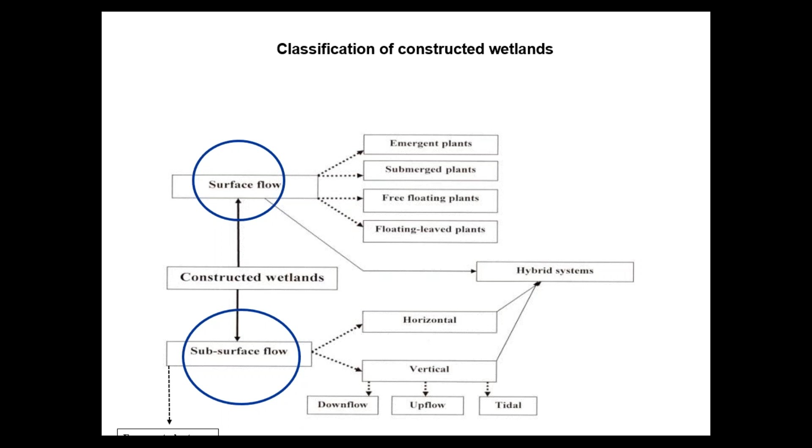Hybrid systems are mostly a combination of horizontal and vertical flow systems in order to achieve better removal of total nitrogen. Horizontal flow systems, which are anoxic or anaerobic, provide good conditions for denitrification, while vertical flow systems are very good for nitrification. So if we combine them, we can remove total nitrogen. In general, we can combine all types of constructed wetlands in order to enhance treatment performance.

Let's start with free water surface constructed wetlands. They are usually very shallow trenches with water level between 5 and 40 centimeters, very commonly only 20 centimeters. There is no special requirement for soils; if soil is present, its major role is to support the growth of plants. Liner is optional. These systems are usually very large, some tens of hectares or even larger, therefore a liner would be very expensive.

Vegetation is usually not harvested, only if we use free floating plants like lemna or water hyacinth, where it's recommended to harvest the plants. Otherwise, in systems with emergent vegetation, the decaying plants may provide organic carbon for denitrification. In general, these systems provide very good removal of organics, suspended solids, and bacteria, but this is more or less the same for all types of constructed wetlands.

The major difference is the removal of nitrogen. In free water surface systems, we achieve relatively medium removal of nitrogen because these systems are mostly aerobic, so we can expect nitrification. If algae are present, they may increase pH, and ammonia volatilization may be very effective. In the layer of decaying plant material, we can expect some denitrification. However, there is usually very low removal of phosphorus, because phosphorus is mostly removed by adsorption and precipitation with aluminum, iron, calcium, or magnesium, and in these systems there is relatively very low contact of water and soil.

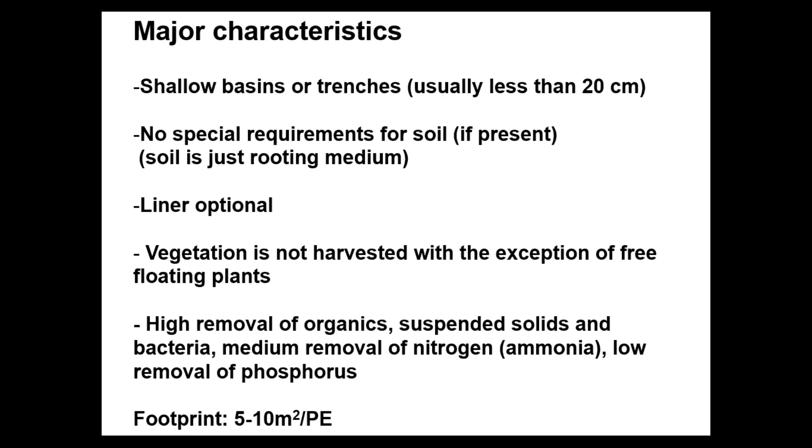The footprint or area required is usually between 5 and 10 square meters per PE, meaning per population equivalent. Let's say, very simply, 5 to 10 square meters per connected person.

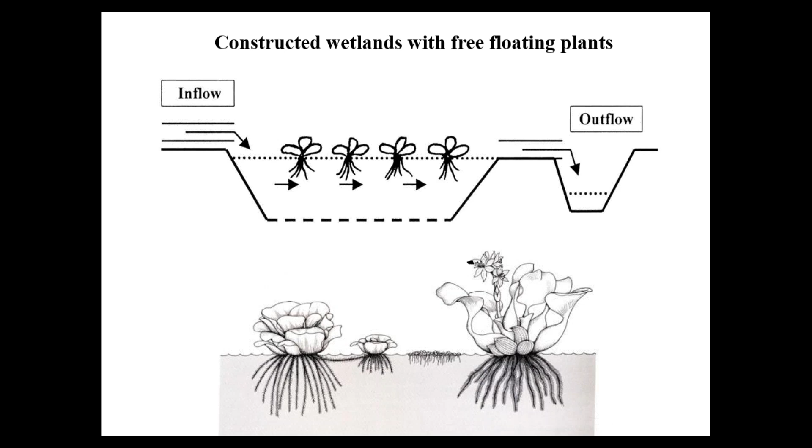So, a few examples: these are constructed wetlands with free floating plants. Free floating plants do not have any active movement; they are moved by wind or current, and there are two major species used: duckweed (Lemnaceae) and water hyacinth. Water hyacinth is a very noxious weed in the subtropics and tropics, and its very vigorous growth gives the potential for removal of nutrients, which is true, but maintenance and operation is a little difficult because you keep on harvesting, and the water hyacinth becomes a waste nobody wants to deal with. One restriction is it doesn't survive winter in temperate and cold climates, so it's restricted to subtropics and tropics, and it creates a lot of waste material during operation.

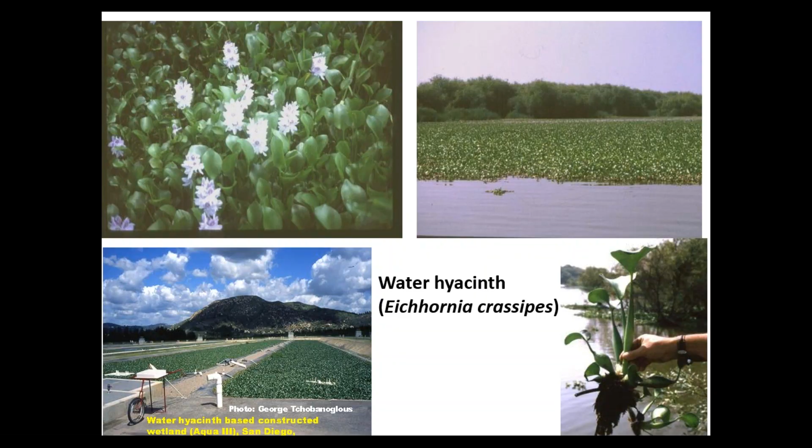This is an example of an existing system from Thailand. You see that the water hyacinth really covers every possible area. So even if you want to prevent the growth, you must create some mechanical fence, otherwise it will overgrow the entire water surface.

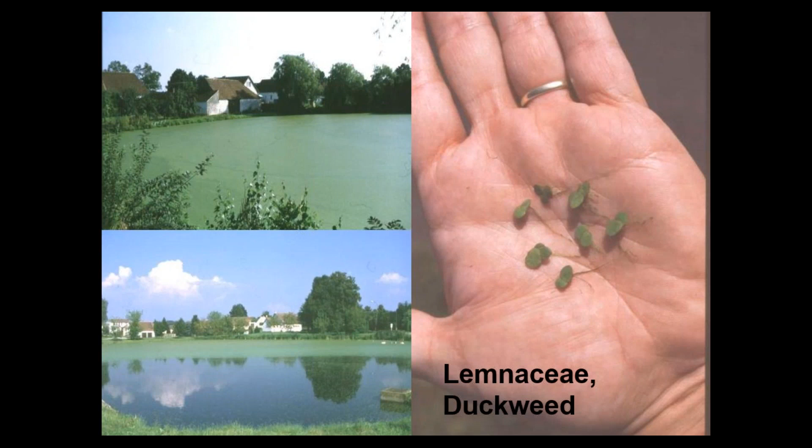Lemnaceae, duckweeds, are very similar, very tiny plants. They are not so sensitive to temperature; they can easily survive in a very cold climate, and they create the same situation we've seen for water hyacinth: they completely cover the surface. On one hand this may help sedimentation of particles, but on the other hand it prevents light penetration into the water column, which may prevent photosynthesis of algae, which are producers of oxygen. So if this situation lasts for a longer time, it may create anoxic conditions.

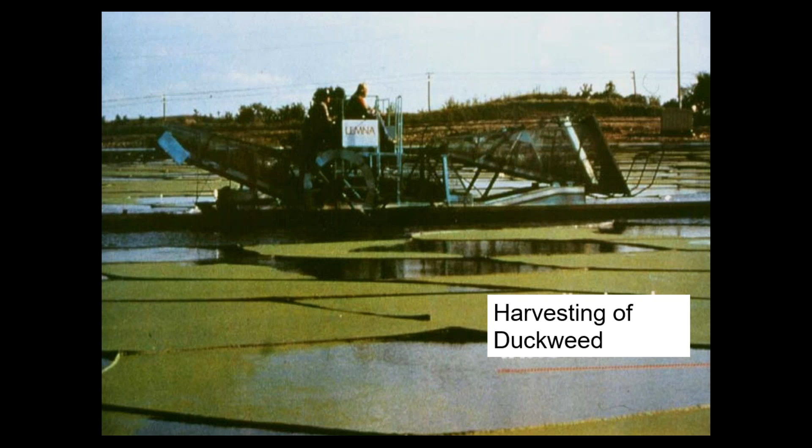As you see, this is the maintenance and operation problems. You also have to harvest the plants quite often in order to allow new plants to grow, and these huge harvesters are necessary to harvest these very tiny plants. So again, maintenance and operation is a little bit more expensive.

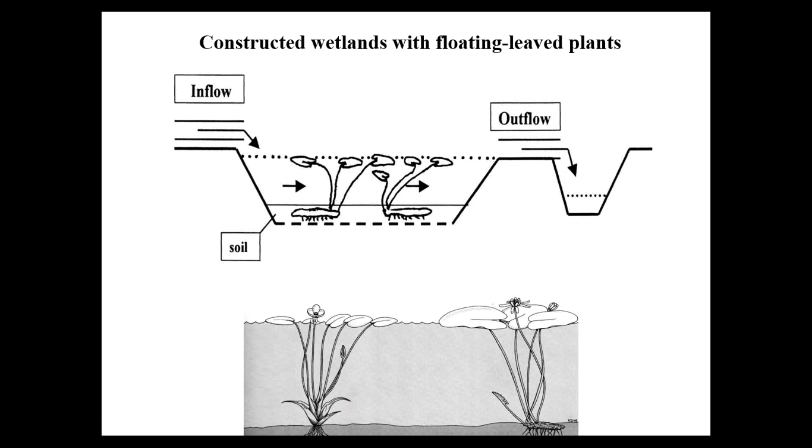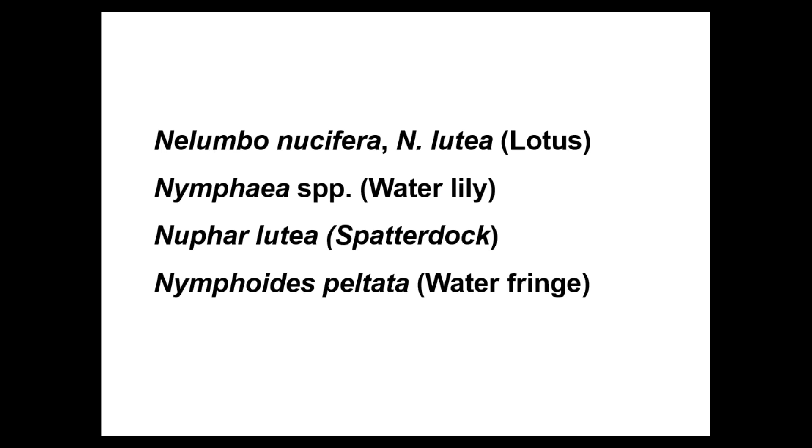Then we have plants with floating leaves. Those are water lilies. There are not so many systems which would use these plants, but there are some, therefore I included it in my presentation. So those could be the species: lotus, water lilies, spatterdock, water fringe, Nymphoides peltata, and nice plants. They are very, very ornamental.

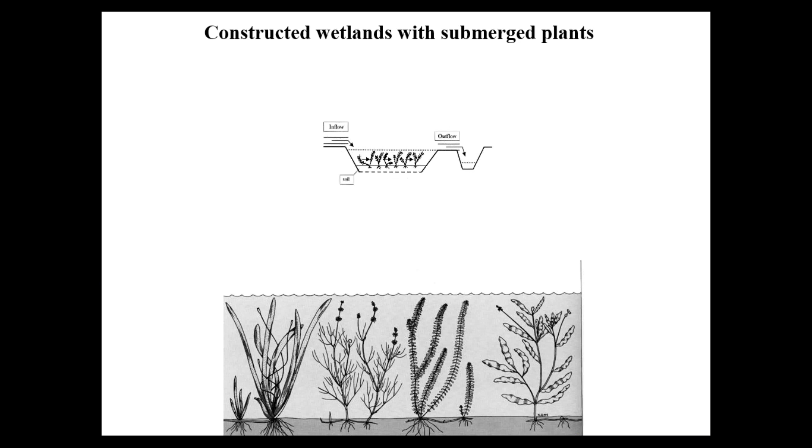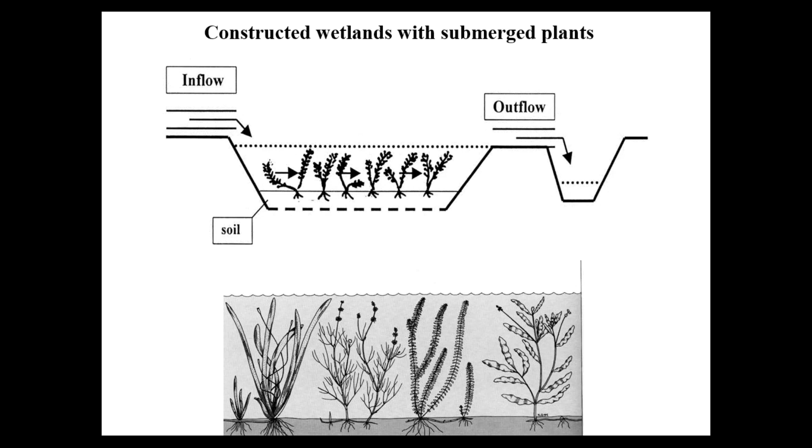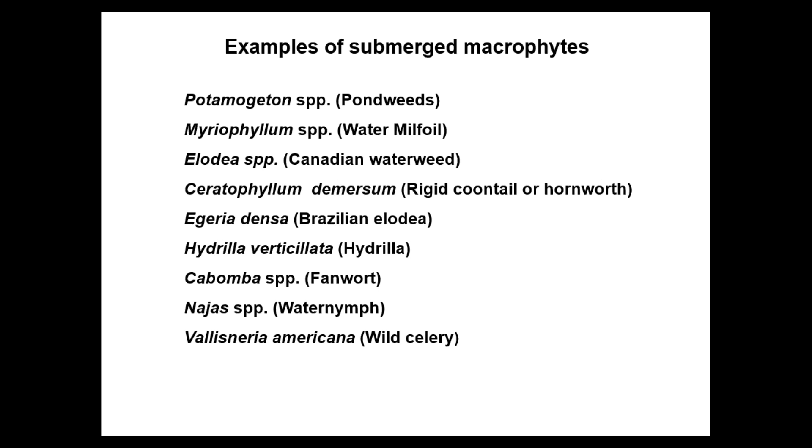Another group are wetlands with submerged plants. Those are plants which are completely submerged in the water. They root in the sediment and they do not grow above the water, that means they are completely submerged. A few examples: Potamogeton, Myriophyllum, Elodea, Ceratophyllum, very common plants you can use in any other natural wetlands.

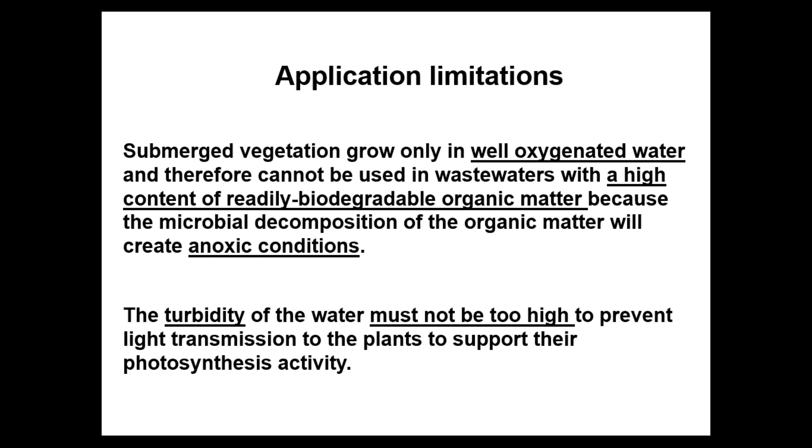There are two restrictions or limitations of application. First, the plants grow usually much better in well oxygenated water. Of course, this is not the case of wastewaters. Also, the turbidity of the water should be very low, because all the photosynthetic parts are submerged in the water, so the more turbid the water, the less light penetrates to the plants and it restricts photosynthesis. Therefore, these systems are usually used for tertiary treatment or to treat waters with low concentration of organics, because if you have high concentration of organics, usually concentration of oxygen is very low.

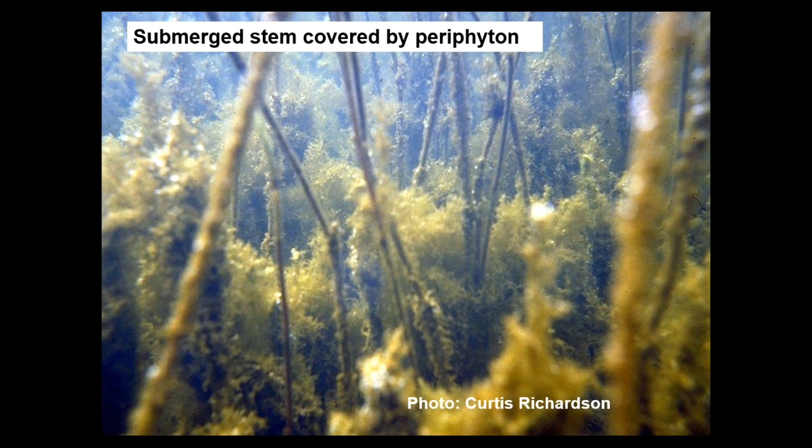It's very quickly depleted. A few examples, and also as all submerged subjects, plants are overgrown with periphyton, which is an assemblage usually based on algae, and they are very useful because they produce a lot of oxygen, so therefore they help to oxygenate the water. They also take up a lot of nutrients, phosphorus and nitrogen, but because algae are short-lived, the storage is not long term, because they die back and nutrients are released back into the water. So it's a very short circle.

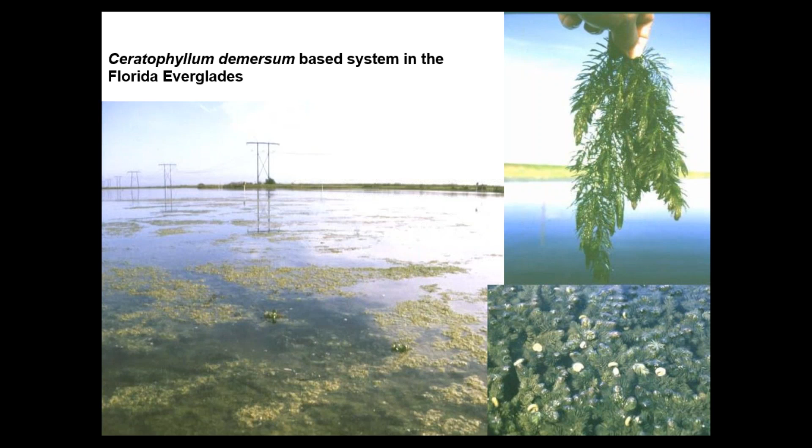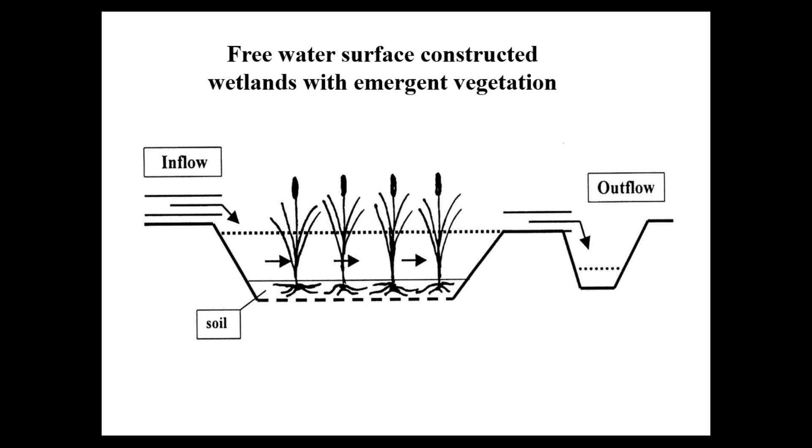Probably the largest group of the constructed wetlands with free water surface are wetlands with emergent vegetation. Those are the most typical wetland plants, like Phragmites, Typha, Carex, Scirpus, Juncus. It's usually a shallow trench with the water level between 5 and 40 centimeters, and is very heavily overgrown with wetland vegetation.

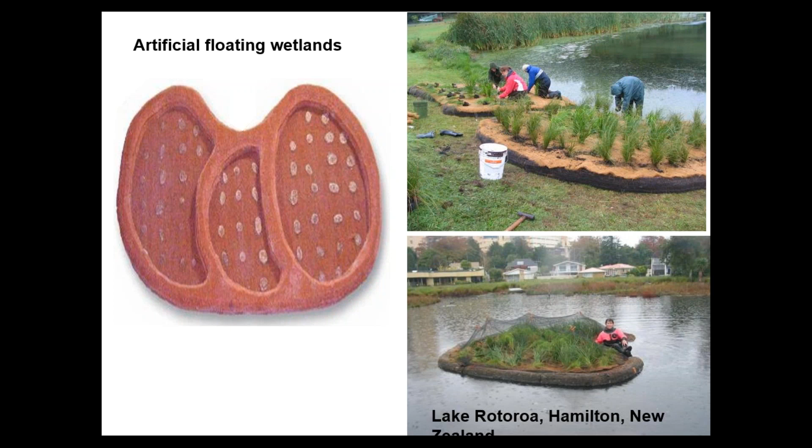These islands could also be smaller ones, like this example from New Zealand, where they use floating styrofoam forms which are artificially planted with plants and may help clean the water.

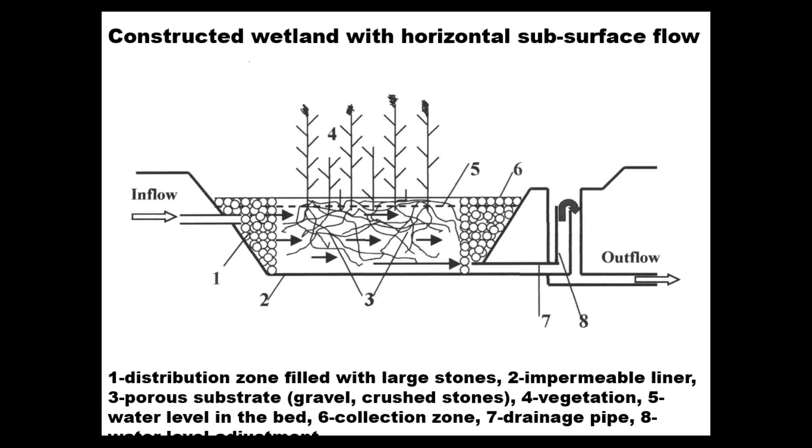Now we come to subsurface flow constructed wetlands. The first large group are those with subsurface horizontal flow, where the pre-treated water comes to a zone of large stones for good distribution. Then the water flows, ideally, through very porous material, usually gravel or crushed rock, and is collected at the end of the filtration bed. Using the principle of connected vessels, the water level in the filtration bed can be maintained at the outflow sump.

These systems require good mechanical pretreatment to remove as much suspended solids as possible, because they can clog the filtration material. They are usually 0.6 to 1 meter deep and use filtration material with very high hydraulic conductivity.

The early systems, used in Germany and Denmark in the late 1970s and early 1980s, used soil. Soil had very good treatment efficiency, but hydraulic conductivity was very low, and the subsurface flow usually switched to surface flow very soon.

These systems are usually always lined, in most cases with a plastic liner. Emergent wetland vegetation harvest is optional, but in most cases it's harvested, with the exception of the UK, where they never harvest the plants.

Again, it's very effective for removal of organic suspended solids and compounds removed under anoxic or anaerobic conditions, such as nitrate and sulfate. There's good removal of bacteria and heavy metals. On the other hand, there is usually very low removal of ammonia, because the filtration bed is mostly anoxic, so there isn't enough oxygen for nitrification, and also low removal of phosphorus, unless special materials are used.

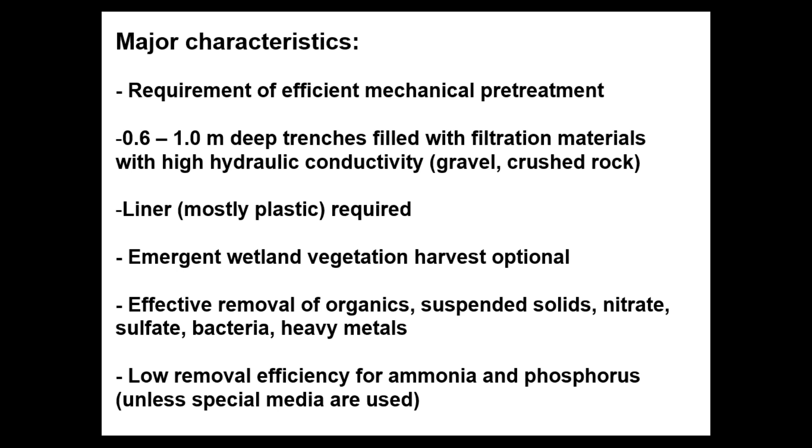This is one of the topics being intensively researched now: the use of filtration materials with large sorption capacity. It could be expanded clay particles, or waste materials like slags rich in calcium, iron, or aluminium. But the sorption capacity is always limited, so at a certain time it needs to be replaced. In general, these systems are not very useful for removal of phosphorus.

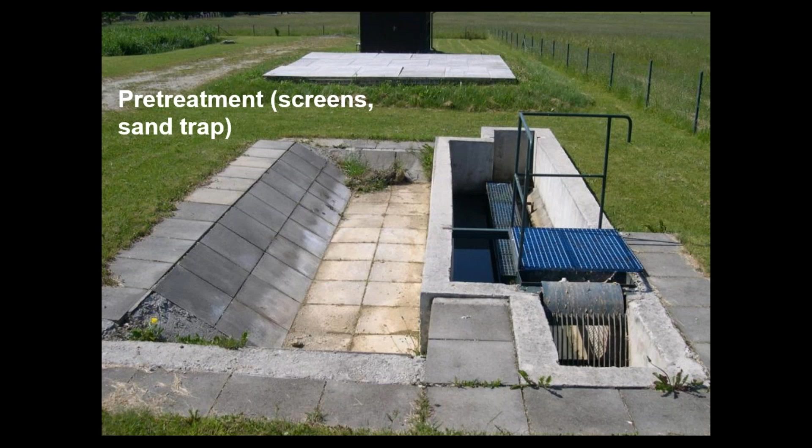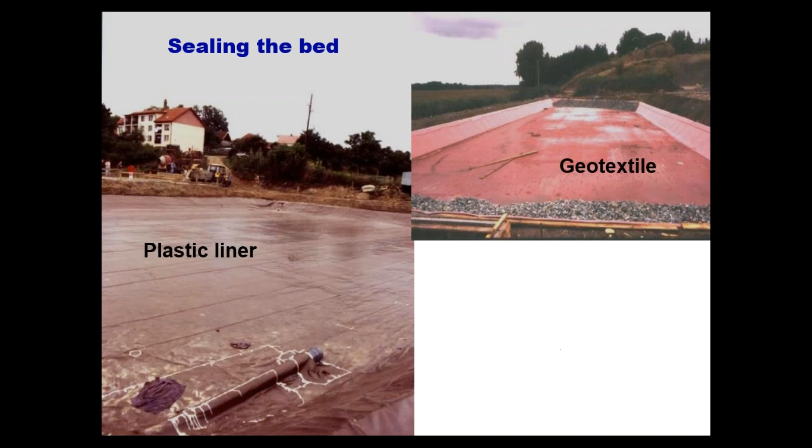So a few examples of the layout. This is a very simple pre-treatment, for example for a small village. You can see the screens in front, and there's a sand trap or grit chamber, whatever you call it. As I said, the systems are usually lined with plastic, and sometimes covered with geotextile to provide good protection.

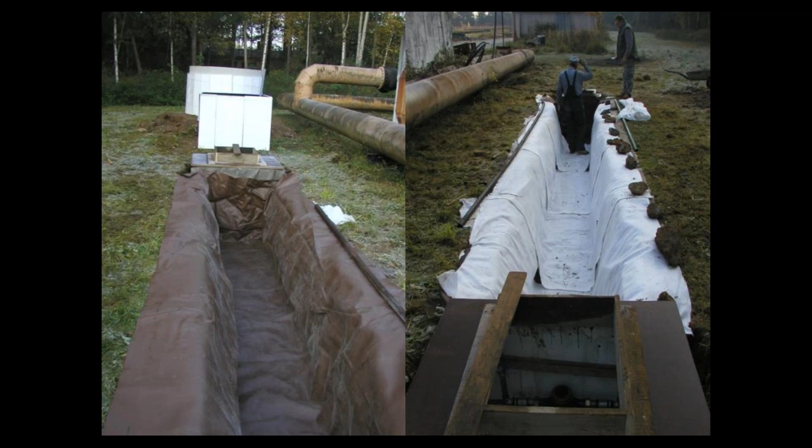Here we see the liner of a small on-site system, with a plastic liner and geotextile on the side. This is a little larger installation. On the right side, you see the distribution zone filled with large stones for good distribution, and then the filtration material.

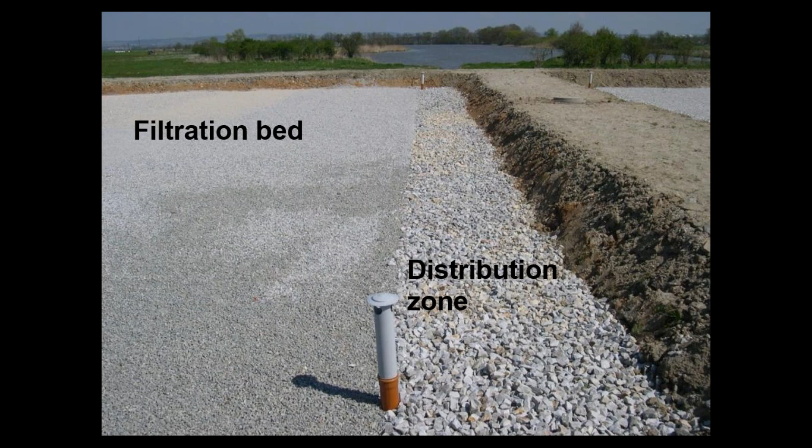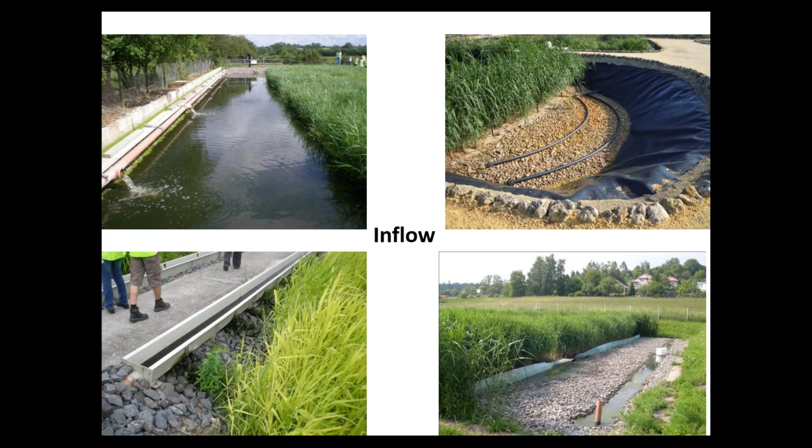This filtration material is usually sized between 5 and 20 millimeters, and it's recommended to use only one fraction, no layers at all. Even mixing is sometimes not good, because water always tries to flow the easiest way, causing short circuiting. So one fraction is best. Then we have water distribution, which can be done in different ways. It's really important to distribute the water across the bed in order to load the whole profile evenly.

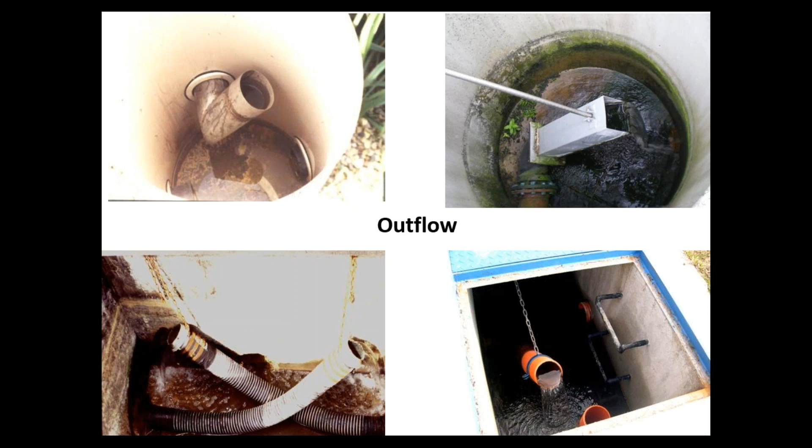We also have some mechanisms using which we can maintain the water level. The lower two pictures are probably the best: either a flexible hose or plastic pipe hanging on an easy chain, so you can move it up and down if necessary.

And we have the vertical flow constructed wetlands, which differ from the horizontal ones because the water flows vertically. It's brought to the surface and percolates through the filtration layers to the bottom where it is collected.

In difference with horizontal flow systems, here we use layers. Usually we use some coarse material on top in order to prevent clogging. The major filtration layer is usually sand, and then we have the drainage layer with larger stones at the bottom. They are intermittently fed in order to allow for oxygenation of the bed.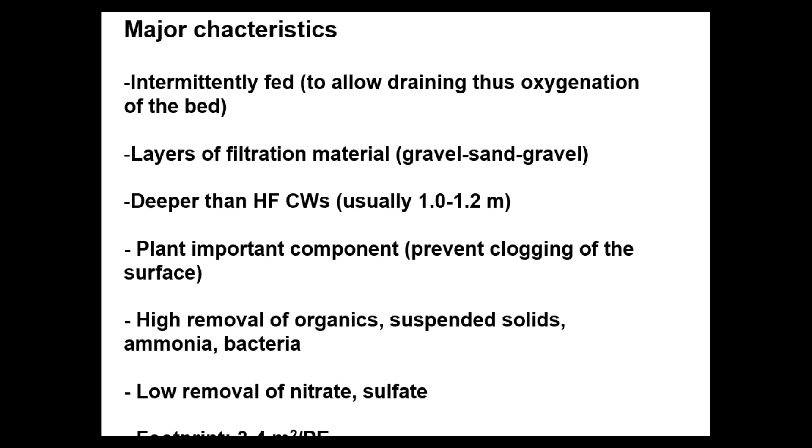I'm not sure if you can see the bottom line, but it says the footprint is between 3 and 4 square meters per person. I may have missed showing it for the horizontal flow systems, but those are usually 5 square meters per person. So vertical flow filters usually use a little bit less area: horizontal flow about 5 meters, vertical flow 3 to 4 meters.

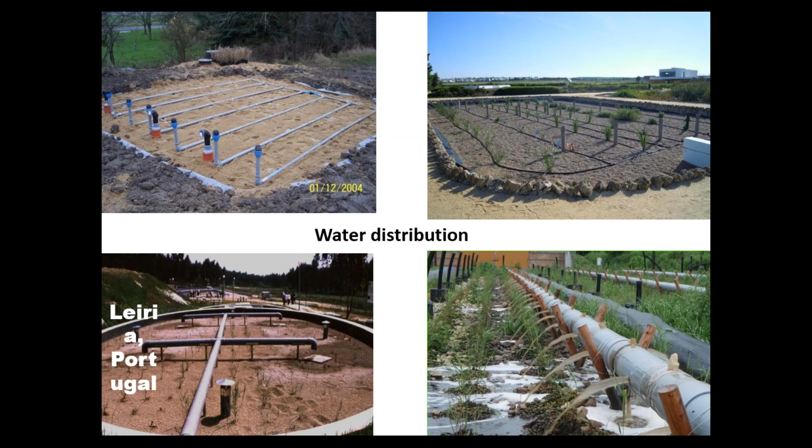Here is the different water distribution. Again, we need to supply the whole surface evenly, and the best way is to very temporarily flood the whole surface so the distribution of water is very even. If, for example, some of these pipes fail, we can overload a certain part of the filter, while another part may not be filled with water at all.

A few examples: this is the on-site system in Denmark, in Mørke. The next system is from France. France is probably the country where vertical flow systems are used most - they have 3 to 4,000 installations in France, again planted with Phragmites australis.

This is a quite large installation, 25 hectares in China, in South China near Guangzhou. They have these plants planted across 25 hectares of vertical flow. So even these vertical flow systems can be really very large.

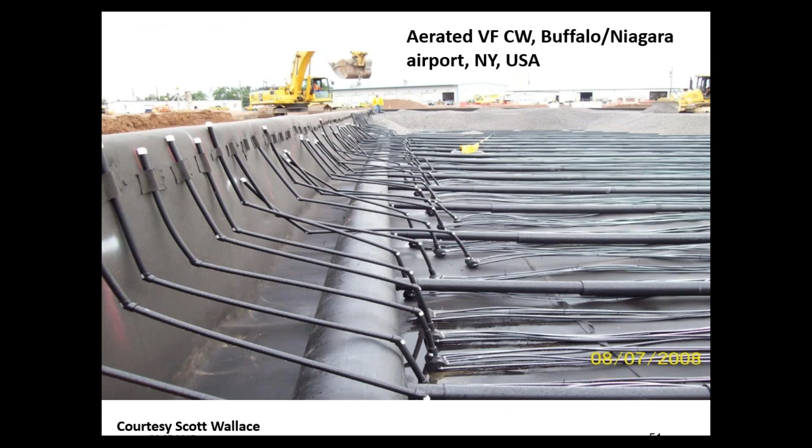There are also some attempts to enhance the treatment performance of the systems using artificial aeration, which increases the supply of oxygen and makes the processes mostly oxic. But it's always a question, because aeration is usually the most expensive part of wastewater treatment, so we need to calculate if it's really worth making this installation.

One special example is the so-called zero discharge willow constructed wetland in Denmark. They are mostly built in Denmark - there are several thousand installations. They are relatively large; this one is for one farmhouse, maybe 200 to 300 square meters, planted with willow, Salix viminalis, which has a very high rate of evapotranspiration.

The principle is that during the winter, when there is no evapotranspiration - in Denmark that's between November and about March - the filtration bed slowly fills with wastewater and rainwater. However, during the growing season, evapotranspiration is higher than the inflow, and the water level actually goes down, so there is no outflow. This is very good because you don't need to deal with discharge limits, as there is no discharge.

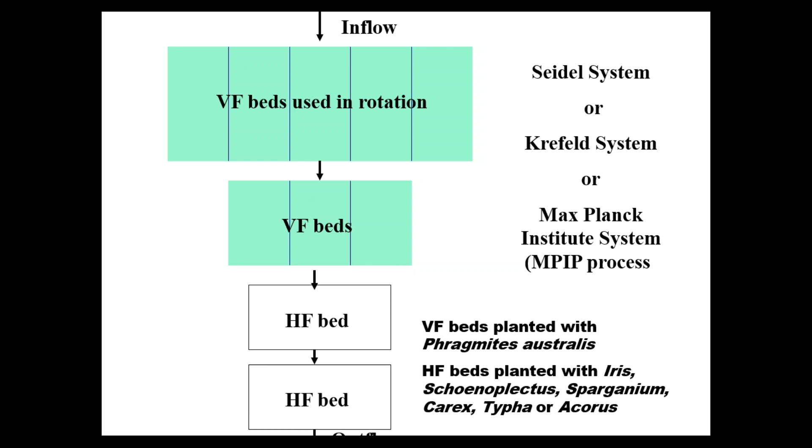This system is relatively old, suggested in the early 1960s in Germany by Dr. Seidel, so these systems are sometimes called Seidel systems. They usually have several vertical flow beds used in rotation, about one week each, followed by a series of horizontal beds. The idea was to achieve nitrification in the vertical flow beds and denitrification in the horizontal flow beds.

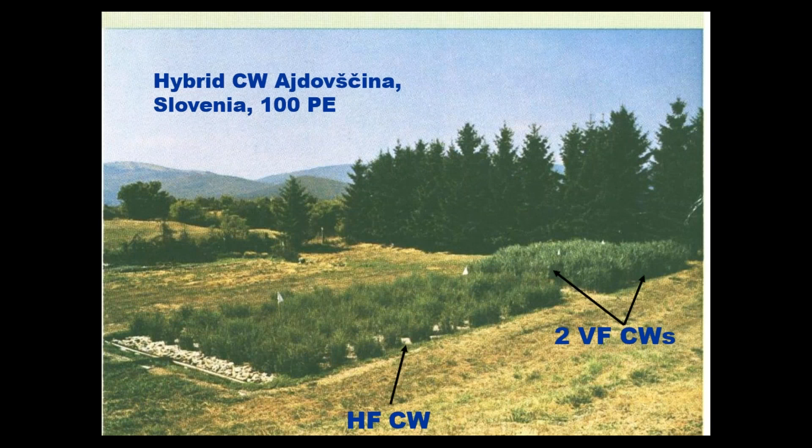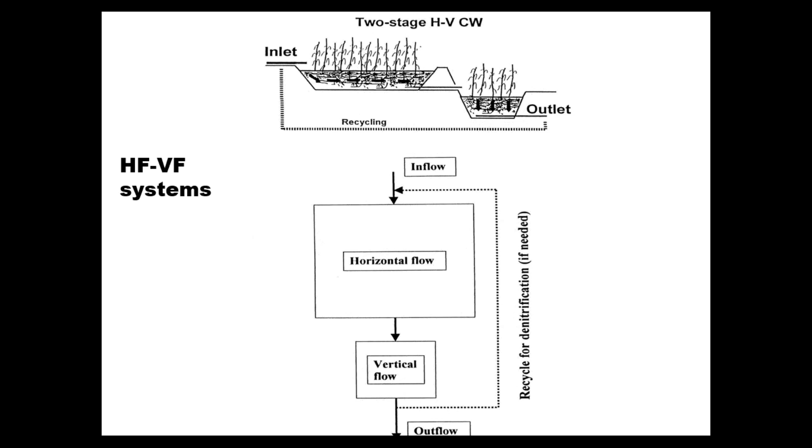In the late 1990s, Danish colleagues came with another idea, more or less the other way around: first a horizontal flow stage, then a vertical flow stage. The idea is to remove organics and suspended solids in the horizontal flow bed and achieve nitrification in the second bed. The outflow is very low in organics and very high in nitrate, so the water is recycled to the inflow, giving high nitrate concentration combined with organics from the raw wastewater. This way denitrification is achieved in the horizontal flow bed.

Here is the system, which has been very well studied in Denmark. And here are a few examples of hybrid systems which combine different systems.

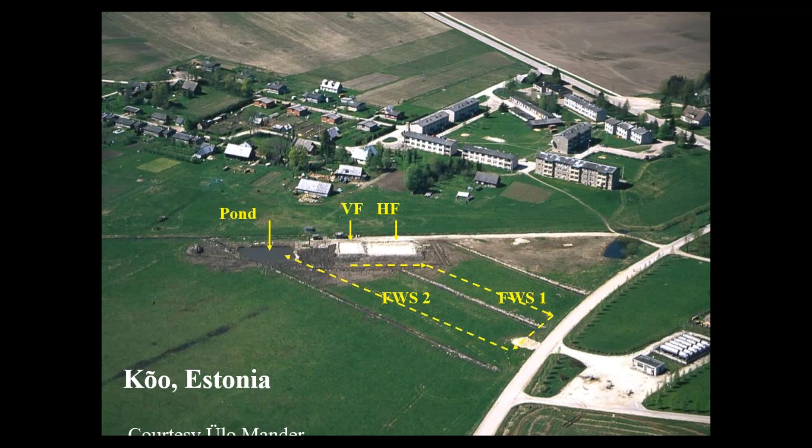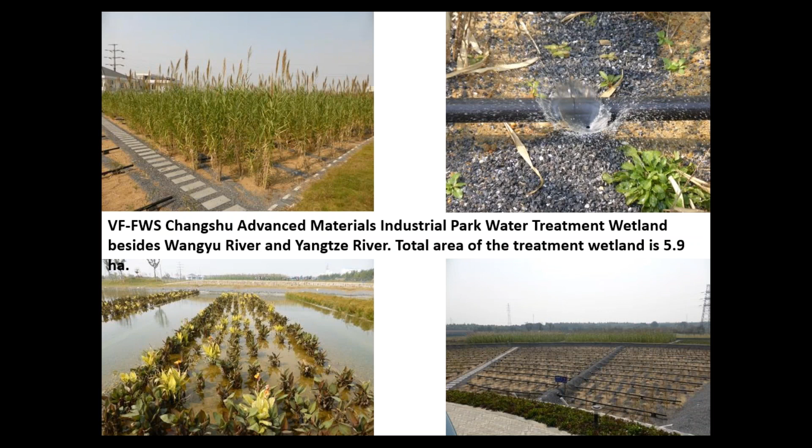This is a combination of free water surface and vertical flow system in China. Again, you see that in China quite a few systems are very large—this one is nearly 6 hectares. For European scale it would be extremely high, but for China it's a relatively small wetland. On the upper right corner you see the sprinklers which distribute the wastewater in the vertical flow systems.

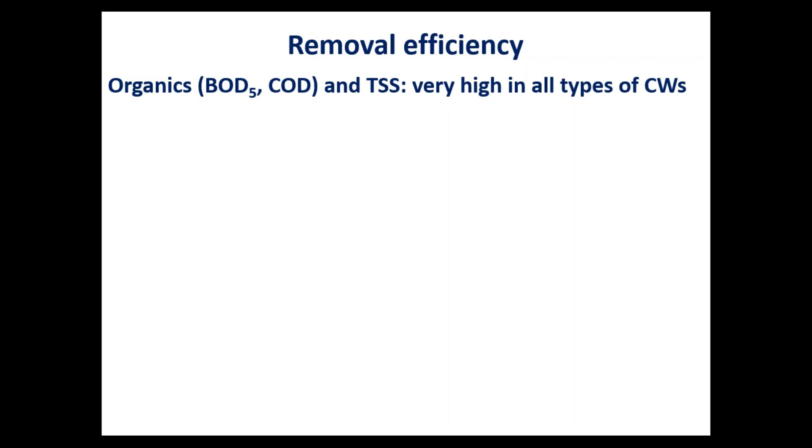In general, removal efficiency is very high for organics and suspended solids in all types of constructed wetlands. For ammonia, it's very high in vertical flow systems, moderate in free water surface, and very low in horizontal flow systems because of the lack of oxygen. The removal of nitrate is the other way around: high in horizontal flow, low in vertical flow, with moderate removal in free water surface systems.

For total nitrogen, removal is moderate in all single systems but can be enhanced in hybrid constructed wetlands. Phosphorus removal is usually quite low unless we use special filtration material. Bacteria removal is usually very high, partly because of the long retention time, unfavorable conditions for bacteria, and because plants release some antibacterial exudates. So the removal is usually quite good.

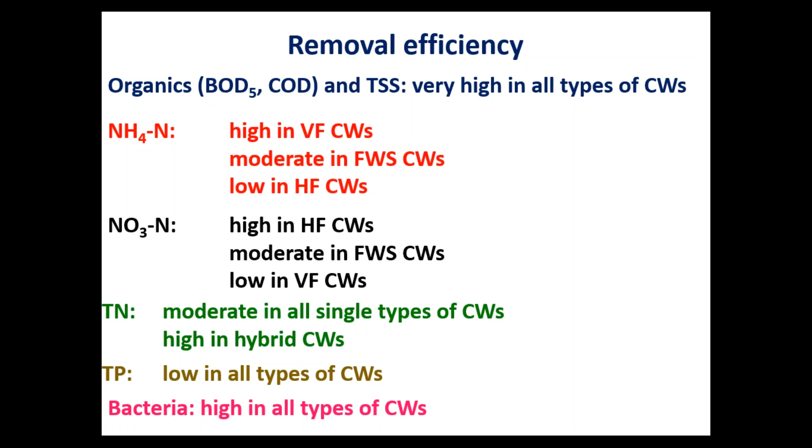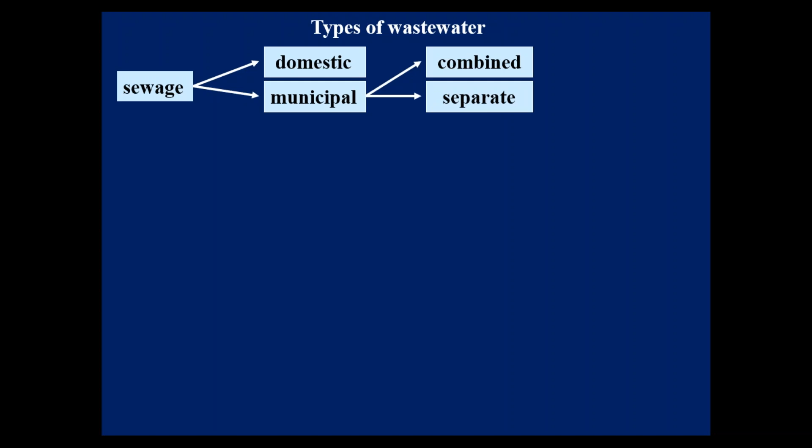Now a short part on the types of wastewaters used in constructed wetlands. The majority of constructed wetlands still treat municipal sewage, either separate or combined—combined meaning combined with stormwater runoff. There is also good use for agricultural treatment, usually for feedlots, and quite a large use for industrial purposes such as mine drainage, whether coal or metals.

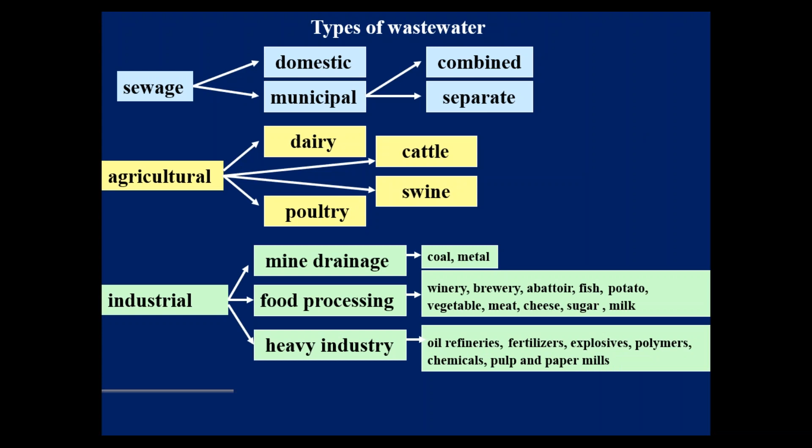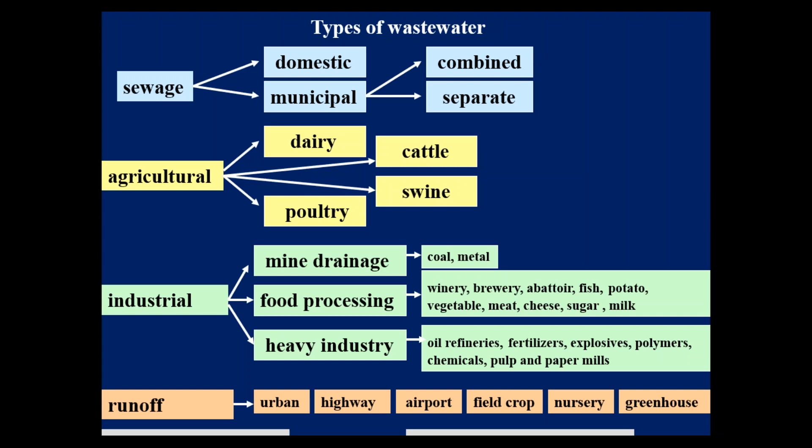It's a very large group of food processing wastewaters, characterized by very high concentrations of organics but usually very well biodegradable—sugars, alcohols, and so on. But we also use them for heavy industry like pulp and paper, fertilizers, and oil refineries. There's very good use for runoff water too—stormwater runoff from cities, urban areas, highways, airports during winter, field crops, nurseries, greenhouses. Also, though not much seen, there is landfill leachate treatment, and sludge stabilization.

Mostly Typha is used because it is very tolerant to pH. These alkaline waters are not extremely alkaline, they may have pH 9, but the acid drainage water may have pH 2 or 2.5 — extremely low pHs.

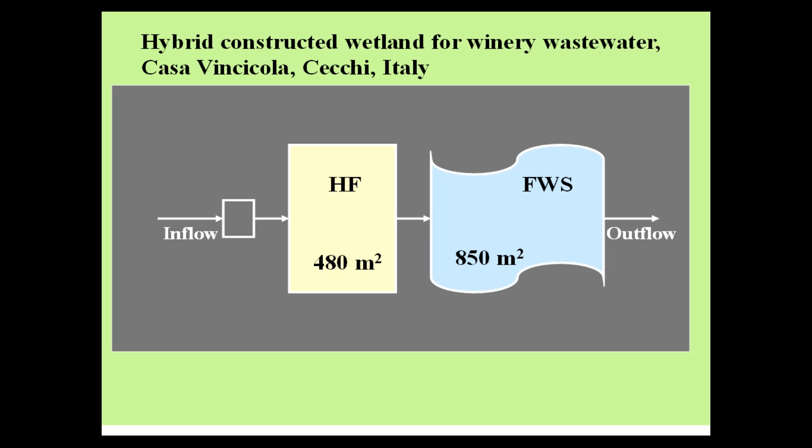This is a combination of horizontal flow and free water surface. This is the horizontal flow bed, very typical, planted with Phragmites, and also we have free water surface — nothing special, just a combination of the horizontal flow and free water surface system.

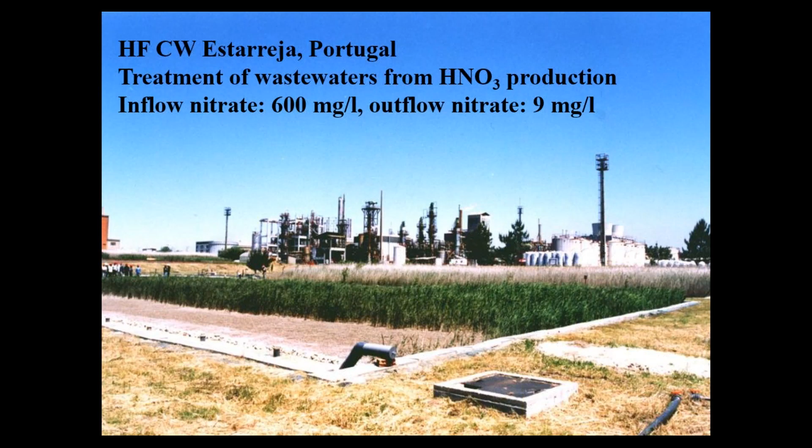Here is the example of industrial wastewater treatment. This is one of the largest chemical companies in Europe, providing nitric acid, in Portugal. You can see that the horizontal flow systems, which are very good for denitrification, manage to decrease the nitrate concentration from 600 to only 9 milligrams per liter.

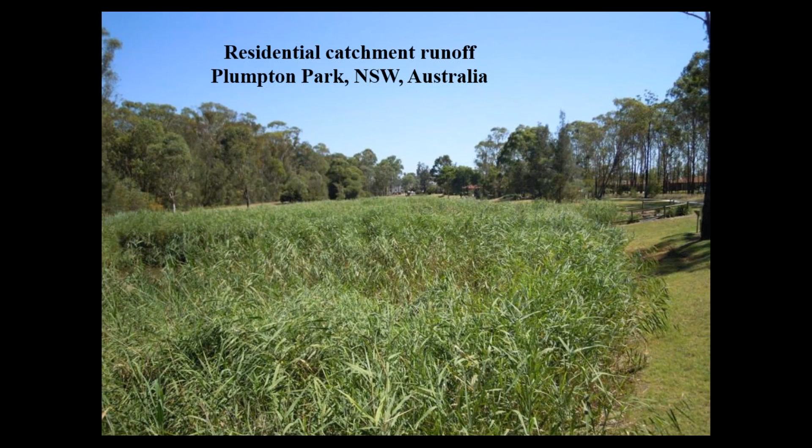This is an example of stormwater runoff from urban areas, from Australia, Plumpton Park in Sydney. As I said, there's a lot of interest in harvesting rainwater, so this is the quite large system which treats it.

This is, I think, a very neat example of the wetland which treats stormwater runoff from a parking lot. If you look at the pictures, on the right side is a very large parking lot in front of the Walmart in Charleston, South Carolina. During the rain, the water comes from these pipes to this small valley and flows through the Typha-based constructed wetland. I think it's a very nice example of how we can use wetlands in cities also.

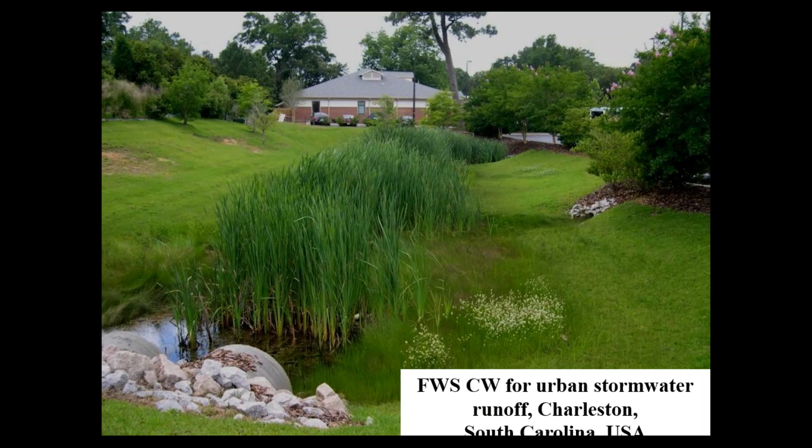Next example is from New Zealand. New Zealand researchers have spent a lot of effort developing guidelines for treatment of tile drainage, because a large part of the country consists of pastures which are quite heavily fertilized, so they have a problem with nitrate.

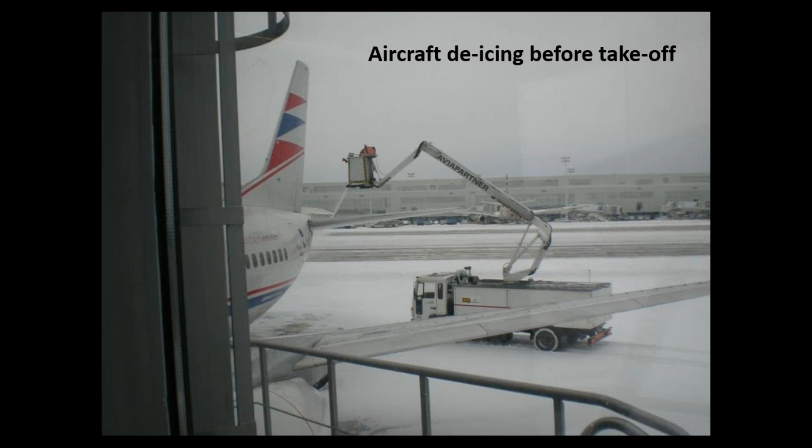Slowly getting to the close: landfill leachate. Landfill leachate is very difficult wastewater — sometimes it's not even classified as a wastewater, it's simply landfill leachate. As I usually say, it contains anything you can imagine: very high concentrations of BOD, COD, ammonia, trace organics, heavy metals.

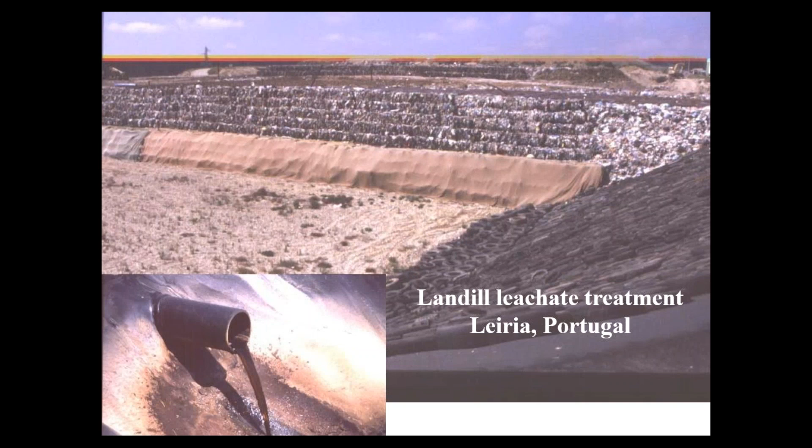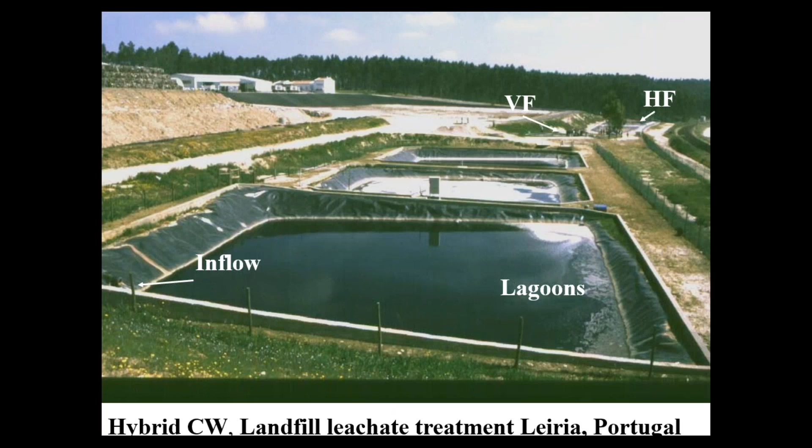Usually lower concentrations of phosphorus, but anyway, it's usually a bad smelling, very colorful liquid. Here's an example from a system designed in Portugal: inflow goes into lagoons, then the water goes through vertical flow and horizontal flow constructed wetlands. Another very old system, from 1991 in Pensacola, Florida, treats wastewater in constructed wetlands. So you can see there's a wide variety of wastewaters which can be treated in constructed wetlands, and at the moment, constructed wetlands can be used for almost any type of wastewater.

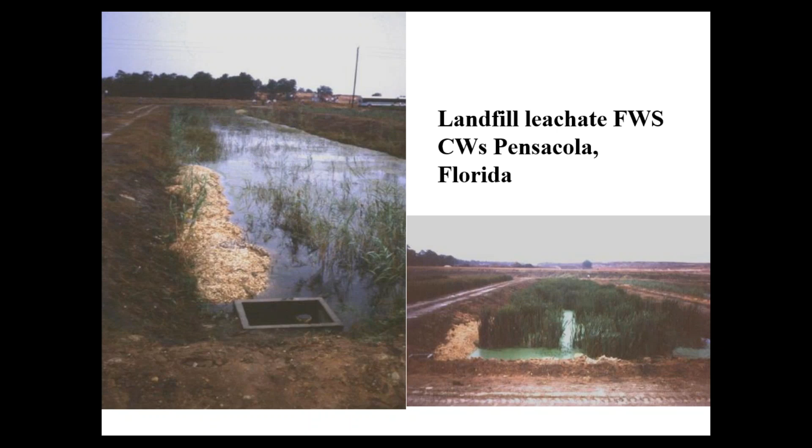And that will be it for today. Thank you very much for your attention. If you have any questions, I will be happy to answer them if I know the answer.